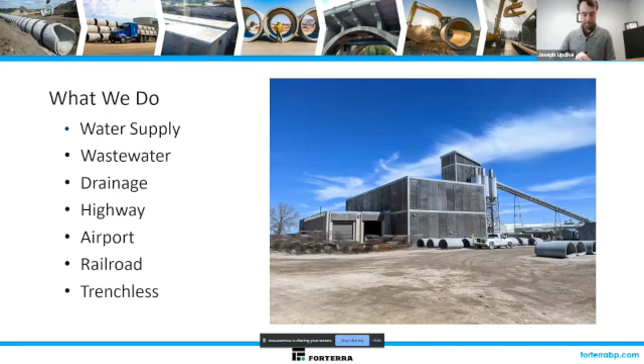So moving on, a little bit about Forterra. We are, as Cheryl mentioned, the largest precast concrete pipe and drainage manufacturer in North America. We design and provide solutions that apply to water supply, wastewater, drainage, highway, airport, railroad, and even trenchless applications as well. Some of the products that we have include pipe, box culverts, bridges, catch basins, and many other precast concrete products as well.

So what we'll be going over today is more or less we'll start with the definitions of sustainability and resilience and work off of that. We will apply those principles to see how resilience and risk relate, as well as how sustainability applies to the environmental, social, and economic aspect of our world. In other words, the triple bottom line. At the end, we will provide a summary of everything we talked about as well.

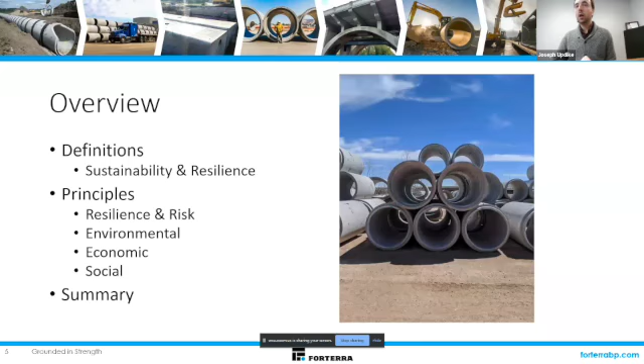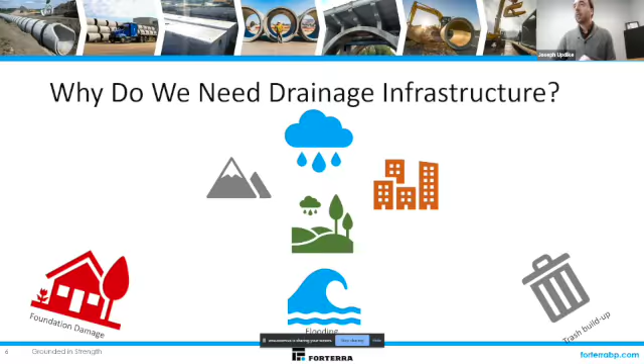But briefly, before we get to that, I want to go over some foundational principles. First off, we can ask the question of why do we need drainage infrastructure? The best answer to that is namely because it rains. It can rain on mountainous terrain and flow into the lower grounds, and this also affects our cities as well. If the rainwater that amounts over time is not taken care of, it can result in foundation damage, significant flooding, or even trash and debris buildup within our cities.

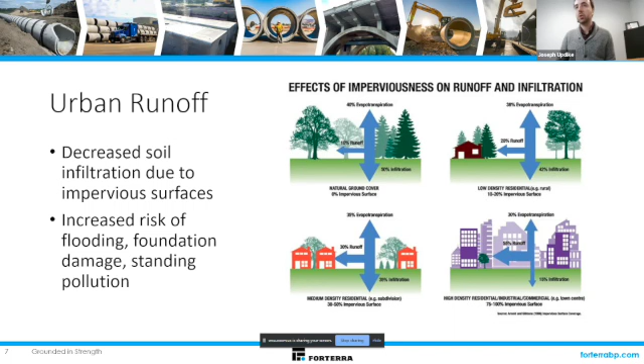When it comes to urban runoff, comparing that to rainfall that covers natural ground, you see that 10% of the water on natural ground goes to runoff, and 50% goes to infiltration. It is able to seep into the ground. When you look, on the other hand, at the high density residential, industrial, or commercial in the lower right picture, you can see that 55% of that rain goes to runoff. This is where you have the increased risk of flooding, foundation damage, or standing pollution.

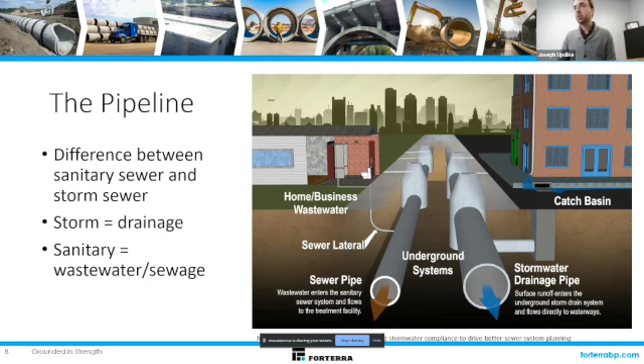Drainage infrastructure comes along to take care of that in an organized way, to protect against foundation damage, and carry the surface runoff into the underground storm drain system, and is able to carry that directly to waterways. Just a technical note as well, there's a difference between our underground systems: we have storm sewer or drainage, as we call it, and this is differentiated from sanitary or wastewater systems as well. So there are two different approaches to handling the water that needs to be taken care of to benefit society.

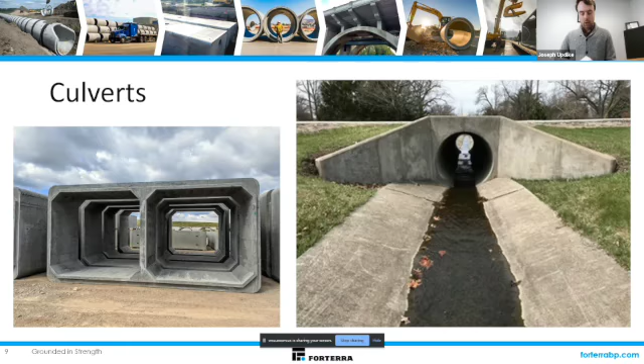For culverts as well, these end up assisting in protecting the foundation for roadways. On the left side of the screen, you can see what we call a double cell box culvert. These are for applications where you have a lot of water running underneath a roadway system. For smaller applications, you see the picture on the right, and this is an example of minor drainage that needs to prevent erosion of the highway or road foundation.

And so looking at the pipe itself, you need to see what functions that the pipe should be able to perform. First of all, it needs to be able to carry a load. The examples that we have are the earth load, the live load, which an example of that is cars running over the top of a highway. You also have construction loading, as they are compacting soil and moving heavy equipment over the installed pipeline. The pipeline needs to be able to carry those loads over the duration of its lifetime.

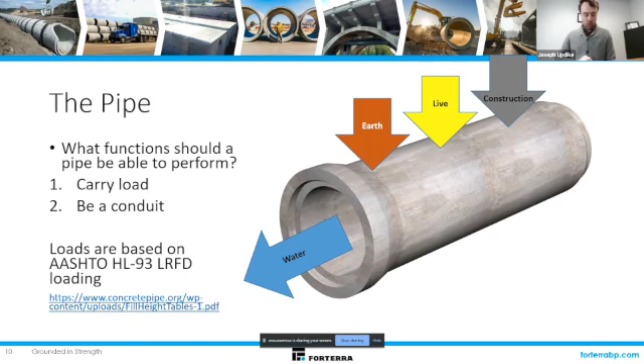The second thing that a pipe is meant to do is serve as a conduit. It needs to allow water to pass through it. These loads as well are based on AASHTO HL93 from the LRFD Bridge Design Manual as well. We have a link here to direct you to a place that provides more information on that.

Another thing I want to highlight is there are multiple kinds of pipe as well. There are rigid pipe and there are flexible pipe, which have a completely different design approach when you are analyzing the loads that they experience, as well as the way that they provide a conduit for water as well.

For rigid pipe, it does not bend. The technical definition is that it is able to deflect less than 2% without cracking. For flexible pipe, it is designed to bend. The technical definition for that is it is able to deflect more than 2% without showing signs of cracking in the pipe wall. Rigid pipe is typically very heavy, whereas flexible pipe are usually very light. The examples that we see with this are plastic and metal pipe, and rigid pipe are going to be your reinforced concrete pipe, which we're talking about today, and your vitrified clay pipe as well. So those are the two most common examples of a rigid pipe.

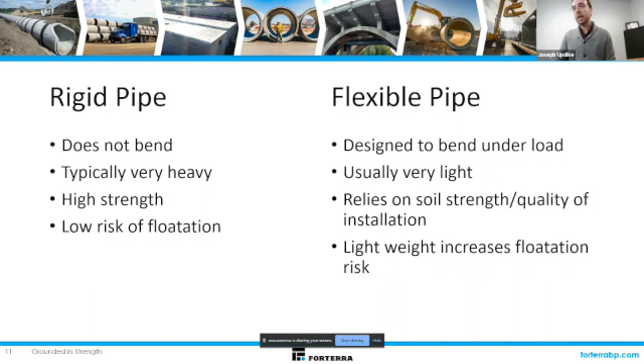Rigid pipe also provides high strength, whereas flexible pipe relies on the soil strength and the quality of installation. Rigid pipe, due to its weight, has a very low risk of flotation, which we'll talk more about in this presentation, whereas flexible pipe, because it is so lightweight, has a high risk of flotation as well.

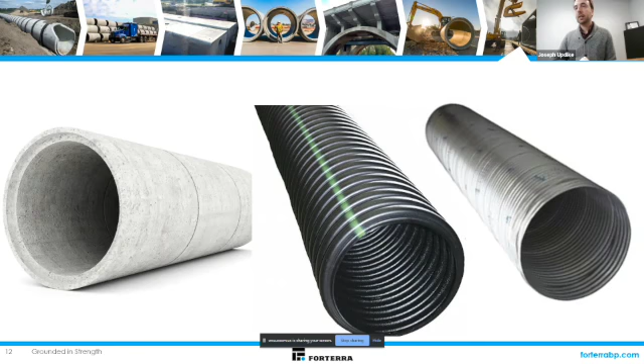And these are just some visual examples of what the rigid and flexible pipes may look like. So we'll skip questions for now and go directly into the presentation on sustainability and resilience.

So why are we here? Why are we talking about these topics? The main reason is that this is a forward-minded aspect of civil engineering. The generations of the future depend on us making responsible, resilient, and sustainable decisions today. This is ultimately part of the legacy that we leave behind us.

But the definition that I want to look at for sustainability is simply this: the ability to exist continuously, or a more common one, meeting our own needs without compromising the ability of future generations to meet the needs of their own. Many people primarily associate sustainability with environmental considerations, but the core concept of sustainability encompasses much more than that.

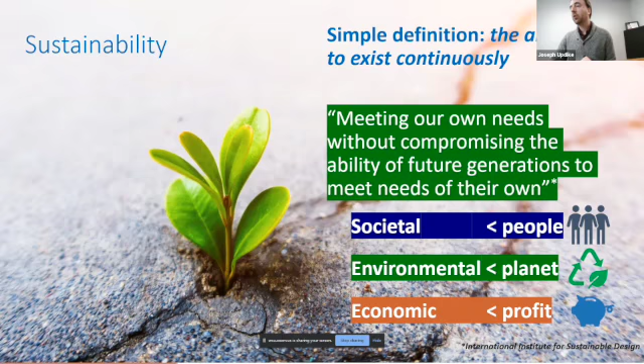Sustainability is looking at everything with a long-term lens. Traditionally, sustainability is categorized by societal, environmental, and economic sustainability. These categories encompass what is referred to as the three pillars of sustainability: the triple bottom line, or people, planet, profit.

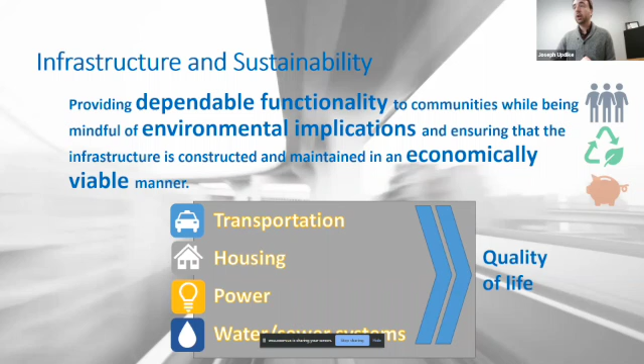It's important that every transportation, housing, power, water, waste, and drainage system be constructed with all three aspects of sustainability as a top priority. Doing so will ensure a higher quality of life for generations to come. Engineers and decision makers must not only be focused on meeting the needs of our communities today, but tomorrow as well. So from here, I will also ask, what does resilience mean for you?

Some things that may come to mind are resistance, limiting impacts, response to adversity, durability, toughness, flexibility, or robustness. The definition we're using today comes from AASHTO, the American Association of State Highway and Transportation Officials. Resilience is defined as the ability to prepare, plan for, absorb, recover from, or more successfully adapt to adverse events.

Because of the present threats that our infrastructure system faces, sustainability should always be coupled with resilience. Infrastructure that is sustainable and also not resilient will inevitably fail because it cannot adequately resist disturbances and will require frequent repairs or replacement. Resilience should thus be seen as a necessary supporting element of sustainability.

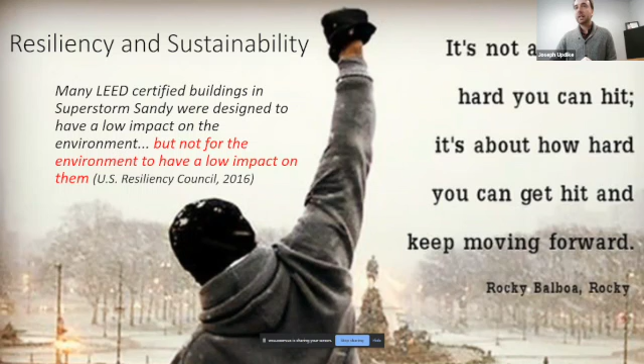In short, I like to think of resilience as a Rocky Balboa quote when he said that it's not about how hard you can hit, it's about how hard you can get hit and keep moving forward. According to the US Resiliency Council, in a 2016 study, they indicated that many LEED certified buildings in Superstorm Sandy were designed to have a low impact on the environment, but not for the environment to have a low impact on them.

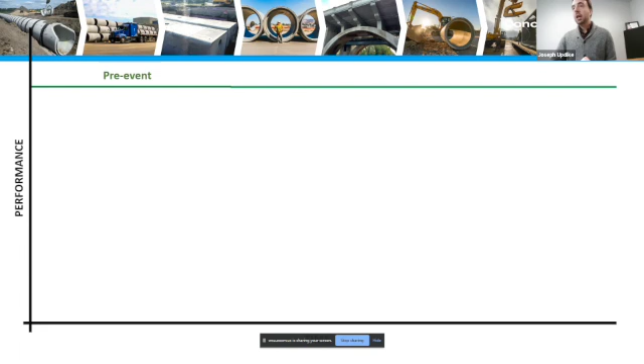Let's take a look at how a resilient system reacts to an adverse event or stress compared to a non-resilient structure. Our chart here shows the performance of the structure against the timeline across the x-axis. The green line is our pre-event performance. Culvert A, let's say, is flowing along nicely prior to any stressful event.

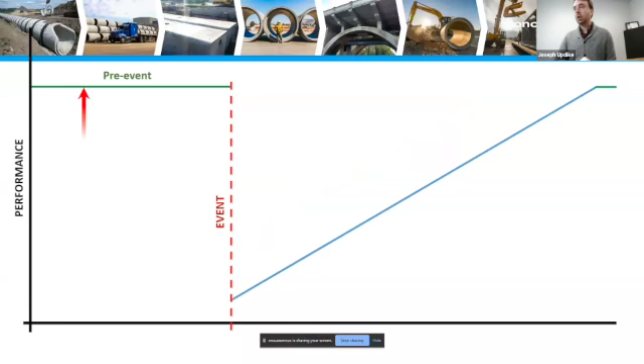Now let's introduce a stress on the system, say a major storm event. In this case, the performance of the system has dropped due to the flood. Perhaps the roadway system was damaged or the head wall experienced scour. While the performance takes a hit, this resilient system experiences only a brief recovery phase and disruption while crews work to bring it back to pre-event operational levels.

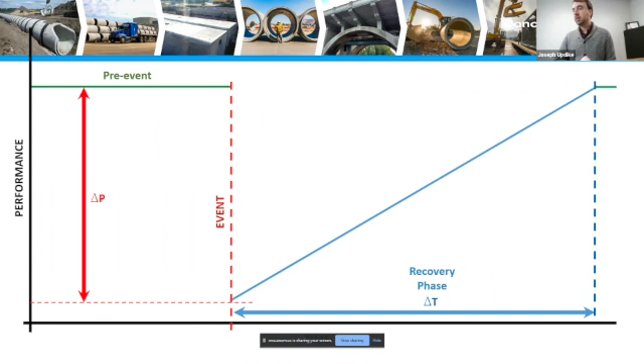But what happens if our culvert isn't resilient? We would expect the performance level to drop significantly during our hypothetical flood. Maybe the pipe backfill washes away and the culvert floats down the stream. In this case, our recovery time is much longer and the amount of energy needed to bring the system back to pre-event operation is much higher.

So how can you measure resilience? One of the keys to understanding resilience is looking at risk.

If you've ever heard of the Argonne National Laboratory, they were the first laboratory in the world to create a self-sustaining nuclear reaction in a small project known as the Manhattan Project. After World War II, this project continued and began developing energy rather than nuclear bombs.

However, they recently developed a tool for measuring resilience of particular systems by introducing a resilience measurement index. A large part of this index involves evaluating the risk of a particular system.

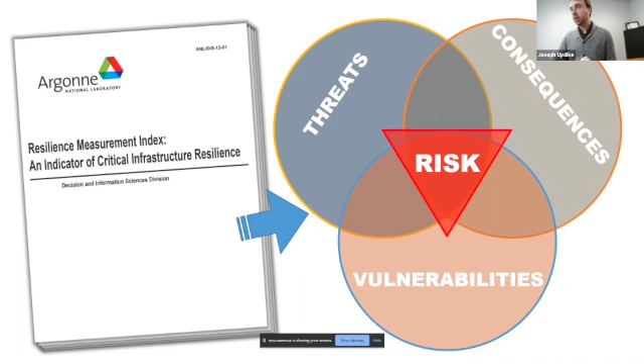In their report, they identify that risk is at the intersection of threats, vulnerabilities, and consequences, as shown in the Venn diagram. Here's another way to view that same concept. Ultimately, consequences are what you're trying to limit and avoid, but consequences are a result of threats matched against a system's vulnerabilities. Let's take a closer look at the risks involved with drainage infrastructure.

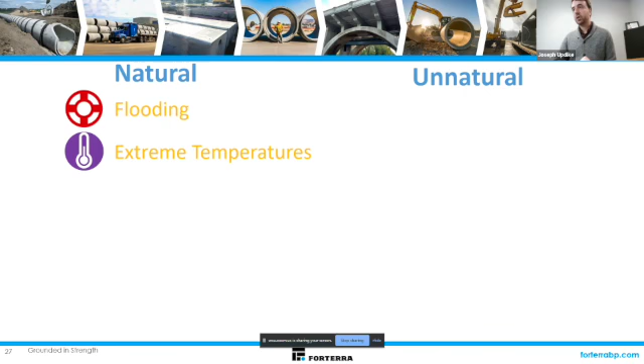We'll begin by dividing these threats into natural and unnatural threats. Flooding is an obvious issue in many places. Extreme temperatures can cause expansion and contraction of various pipe materials. Severe rain can lead to flash flooding. A tropical cyclone, which is a growing concern in many coastal regions, and wildfires as well.

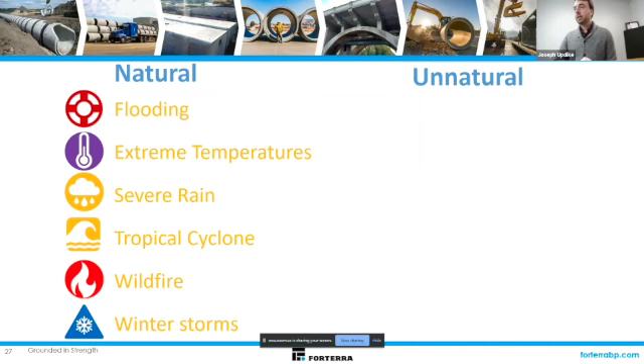While California gets the bulk of the attention, Montana had the largest acreage burned out of any state that experienced severe wildfires in 2021. Winter storms as well, which is what we're experiencing right now in South Dakota, can bring ice and freezing temperatures that cause additional concerns.

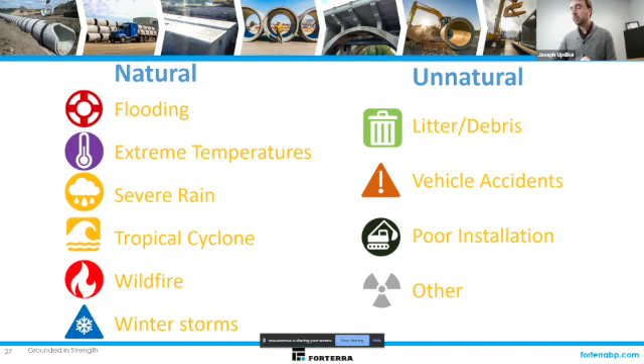Now let's look at unnatural threats. Litter and debris can cause culvert clogging and other damages. Vehicle accidents, you can think of highway fuel spills and where those liquids end up going. Poor installation - this is one of the biggest issues facing flexible pipe installations. And other issues may include vandalism, excessive loading, etc.

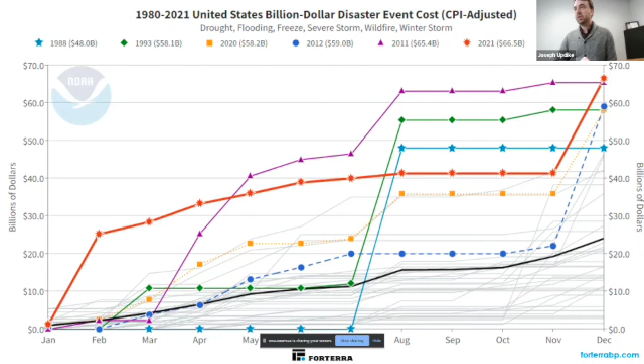The National Centers for Environmental Information tracks billion-dollar weather disasters. This data traces back to the 1980s. The total cost of these natural events has been increasing over the past few years. Resilience seeks to arm our infrastructure to minimize the impact of these natural disasters.

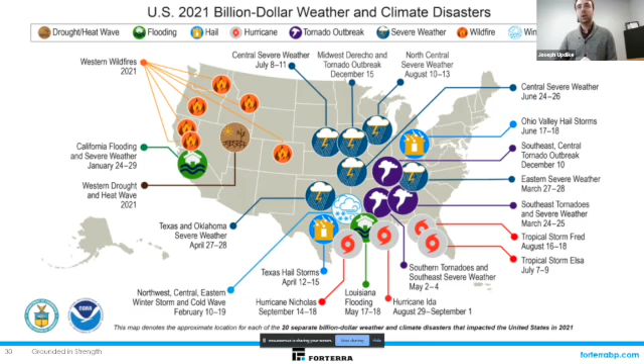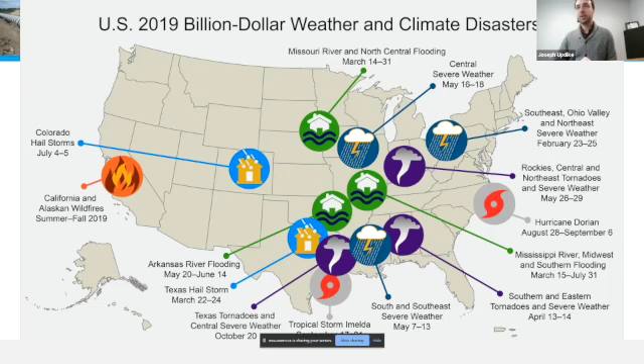Here you can see the billion-dollar disasters that took place in 2021. The Western wildfires that I mentioned certainly made a huge impact to the area where I'm from. This is also compared to the billion-dollar disasters in 2019 as well.

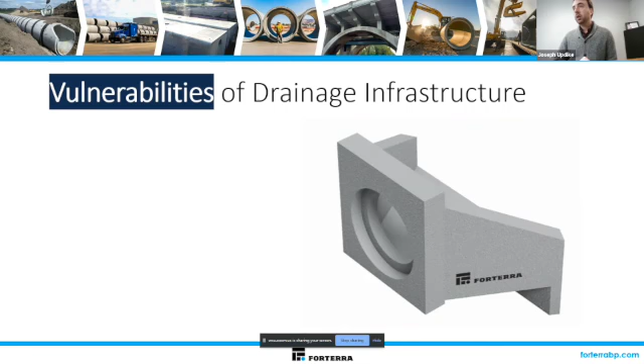What kind of vulnerabilities may there be towards drainage infrastructure? You can have culverts without a head wall, or if the head wall is missing proper reinforcement, they then become susceptible to washout and piping.

Flotation may be a vulnerability as a combination of pipe weight and cover over the top of the pipe. Certain pipe materials and coatings may be prone to catching fire. Deficient joints may lead to excessive infiltration and void formation beneath the surface.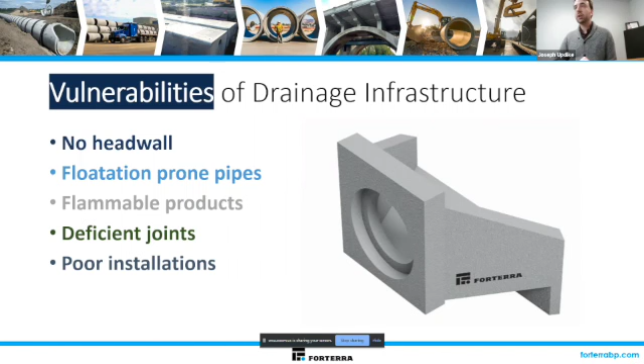Poor installations are certainly another concern. Issues in this area can be avoided with proper inspection before and after installation.

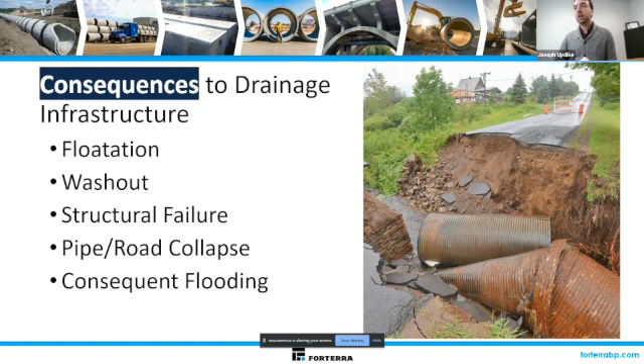Consequences are then our potential negative outcomes. And so from here, we'll talk about some specific cases of where we see the consequences play out.

I don't know if you're able to hear the video on this, but here we see a number of examples of storms as well. These may include 100-year, 500-year, and 1,000-year storms.

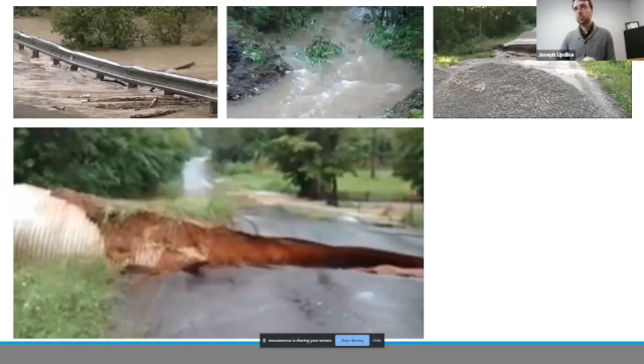Another example comes from a colleague of mine in Georgia, where the road had washed out over a creek during a storm. 2 of the 5 pipes that are shown here washed out along this roadway.

This was a cul-de-sac leading to over 10 homes. During the duration of the storm, this entire subdevelopment was left without access to an escape route or food, and the ability to move in and out of their homes.

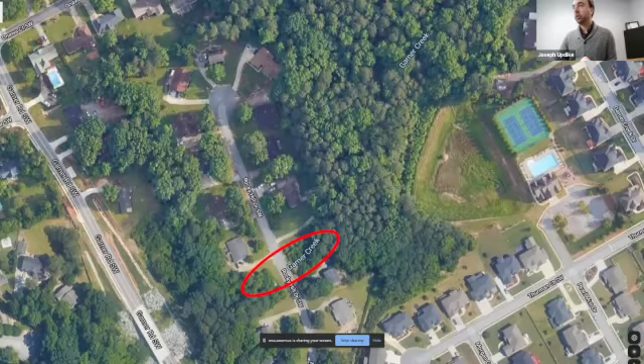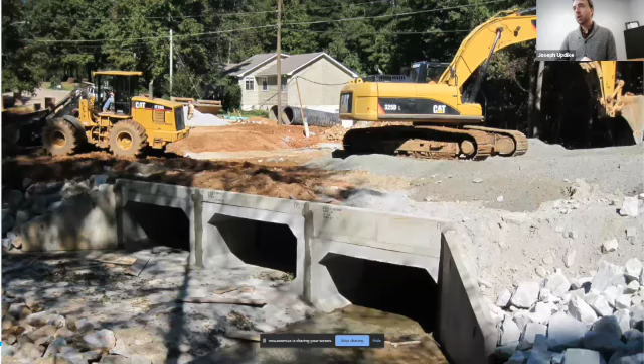This area that washed out was called Garner Creek - these people were left stranded until the proper repairs could be made. Downstream from the washout, my colleague was able to find fragments of this corrugated metal pipe. As you can see from the corrosion, this pipe had failed long before the flood ever happened.

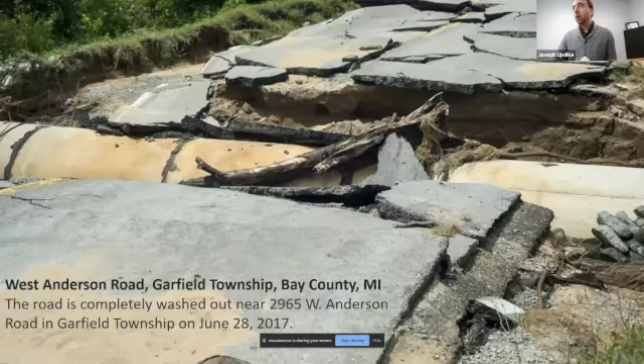This is an example of the latter. It took a long time for these boxes to be put in and for the people in the subdevelopment to have access to leaving the area of their homes.

The primary hope in managing resilience is that something like this never happens. However, because reinforced concrete pipe is naturally resistant to flotation because of its weight, it allowed for significantly lower repair times than what happened in the previous example.

Instead of entirely replacing the pipeline, the road over the pipe was able to have additional backfill placed over it, and the base course laid and pavement re-put.

The Santa Rosa fires in California in 2017 ended up burning more than 5,000 homes and killing 23 people. City codes required the last 20 feet to be constructed of a corrugated metal material in order to avoid fire risk.

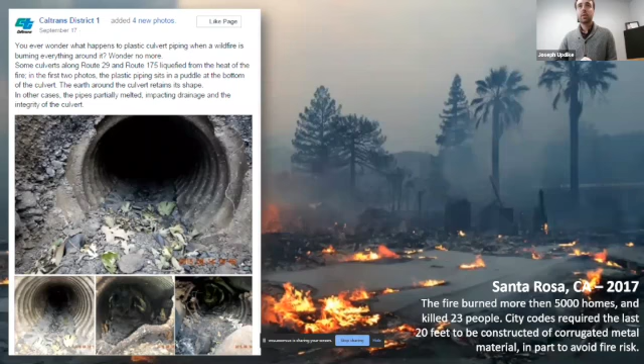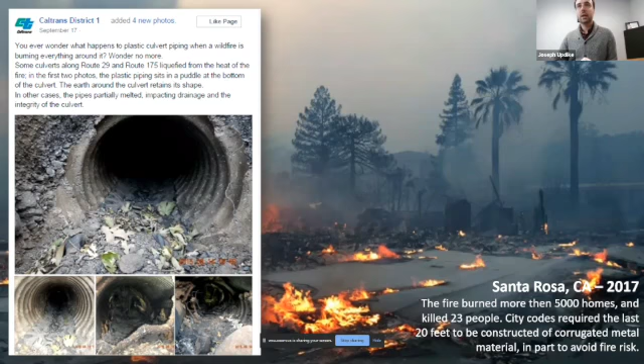This is a post on social media from the Department of Transportation in California, where they asked what happens to plastic culvert piping when a wildfire is burning everything around it. Some culverts along various routes liquefied from the heat of the fire. In the first two photos, the plastic piping sits in a puddle at the bottom of the culvert. The earth around the culvert retains its shape.

In other cases, the pipes partially melted, impacting drainage and the integrity of the culvert. Another example comes from Santa Rosa, California. Wildfires can significantly endanger a piping system, and because they are so critical to the support of the road and various escape or evacuation routes, it's critical to have a pipe that is resistant to emergency disasters.

Another thing about plastic piping is it releases volatile chemicals such as benzene when burned. Benzene is a carcinogenic hydrocarbon associated with crude oil that's strictly regulated by the EPA. Even if a building survives a wildfire, breaches in the system miles away can still contaminate its water.

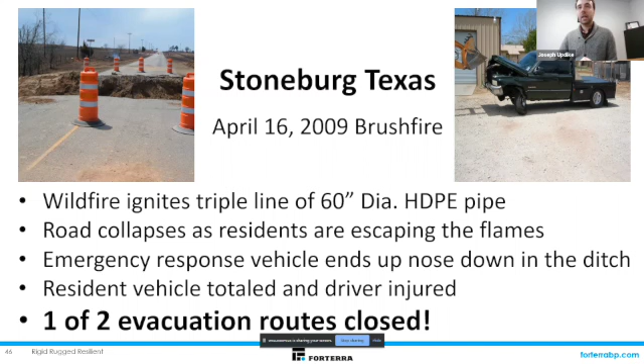Another example comes from Stoneburg, Texas, where a wildfire ignited a triple line of 60-inch diameter high-density polyethylene pipes. The road collapsed as residents were attempting to escape the flames. Emergency vehicles ended up nose down in the ditch as well. And this resident, with his pickup shown there, ended up totaling his vehicle, and the driver ended up being injured. One of the two evacuation routes in Stoneburg during this fire was closed as a result.

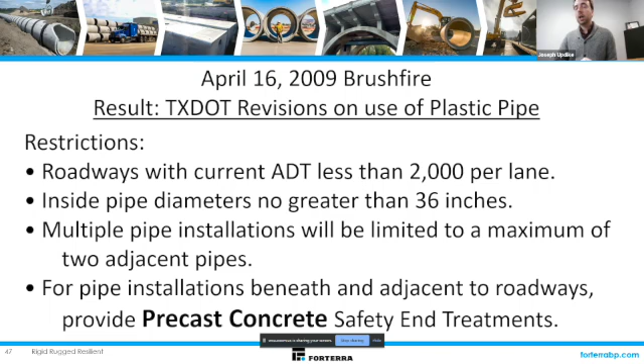Given the disastrous effects of the fire, the Texas DOT implemented a number of restrictions. Plastic pipe was not able to be used under roadways with a current average daily traffic less than 2,000 per lane. The inside pipe diameters could be no greater than 36 inches. Multiple pipe installations were limited to a maximum of 2 adjacent pipes. And for pipe installations beneath and adjacent to roadways, they were required to provide precast concrete safety end treatments as well.

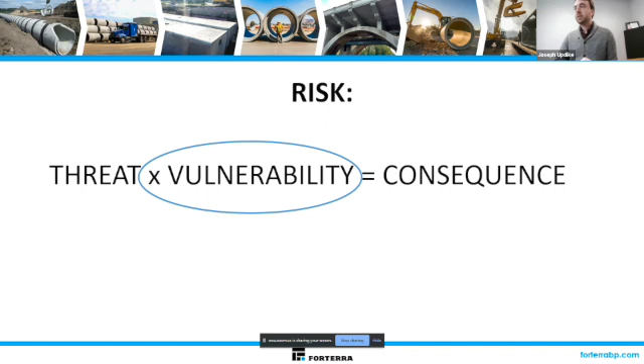This ultimately goes back to show that consequences are a result of vulnerabilities matched against their threats. Threats are ultimately inevitable, although some aspects of environmental sustainability seek to reverse the trend of those threats for the foreseeable future. We will be forced to deal with these threats one way or another. Consequences can also be limited by planning and reactive measures, but reducing vulnerabilities is perhaps the most effective way to limit or remove consequences from threats.

Resilience is ultimately about mitigating risk. When it comes to drainage systems, designing resilience will limit system vulnerabilities and in turn reduce or eliminate potential consequences.

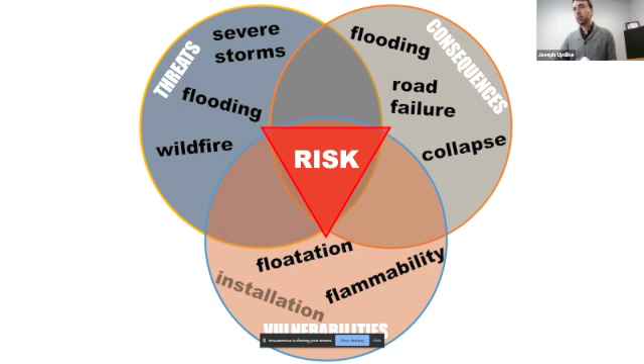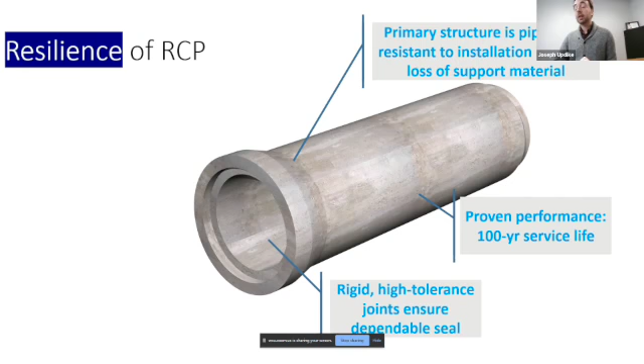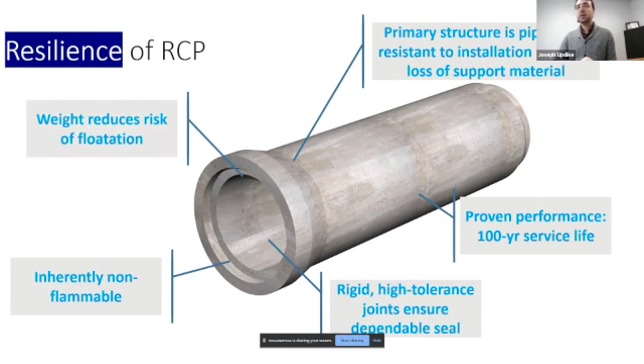Concrete pipe provides inherent resilience that is unmatched by any other pipe material. Reinforced concrete pipe provides the primary structure, and is resistant to installation issues or loss of support material. Concrete pipe is the only pipe material that has a proven performance of 100 or more years for its service life. Concrete pipe is rigid, and that provides for high tolerance joints that ensure a dependable seal. Reinforced concrete pipe is also inherently non-flammable, and its high weight reduces the risk of flotation.

More decisions are being made today on the basis of environmental sustainability than ever before. Environmental sustainability includes a whole gamut of categories, such as air and water quality, waste, pollution, and fresh water use, but most people probably think of climate change first. This is primarily measured by looking at greenhouse gas emissions.

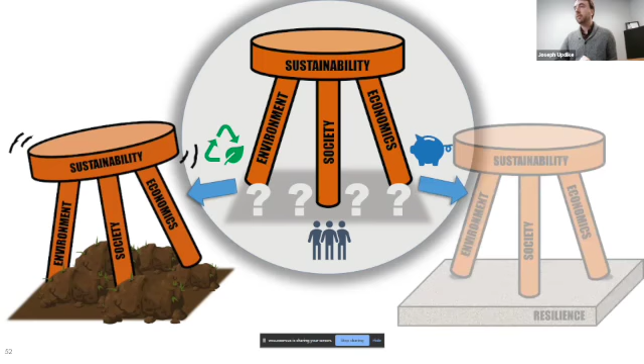Each of the pillars of sustainability provides a unique facet to our quality of life. But as we move into this section, let's keep in mind that the foundation of this sustainability is resilience. As with any structure, if it isn't built on a solid foundation, it doesn't matter how strong your pillars are.

If you've ever heard that if concrete was a country, it would be third in the world in terms of emissions. However, concrete itself has actually relatively low emissions. The reason we hear the total emissions are so high is that there are 10 billion tons of concrete used every single year, which is more than 5 times as much as any other product material. Concrete is also the most used material in the world next to water.

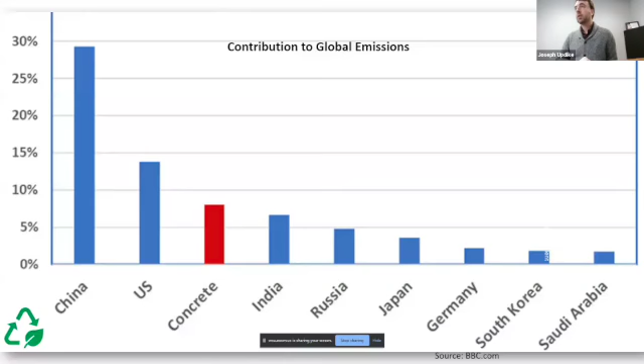However, we can still do what we can to limit emissions. But remember that concrete is a gigantic part of our infrastructure. If we want to look at the sustainability of a particular material, we need to compare it to what an alternative product would look like.

Here it is immediately evident that concrete pipe has the lowest emissions factor on a per weight basis than any other pipe product. Compared to HDPE pipe, reinforced concrete pipe emits less than one-tenth of the equivalent CO2 per unit weight.

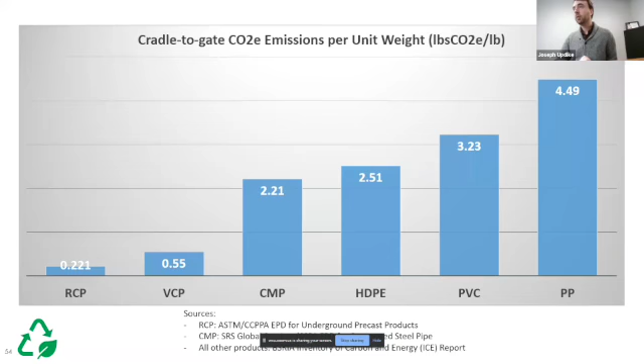75% of concrete's makeup are raw natural resources, such as rock, sand, and water. So it makes sense that it has the lowest emissions of almost any material.

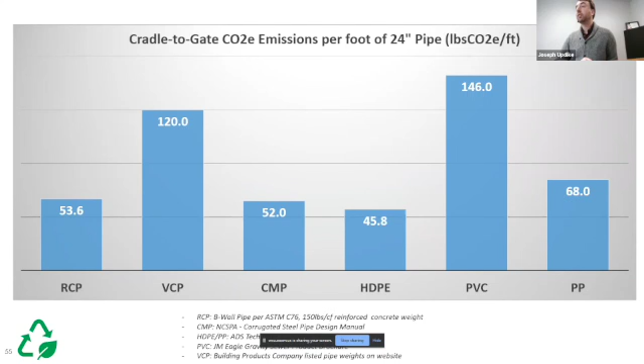However, if we factor in the pipe weights for a given size, the per foot emissions for RCP are still less or comparable to some of the other common drainage products. To be fair, the higher weight of reinforced concrete pipe is providing resilience and structural performance that simply cannot be matched with other products.

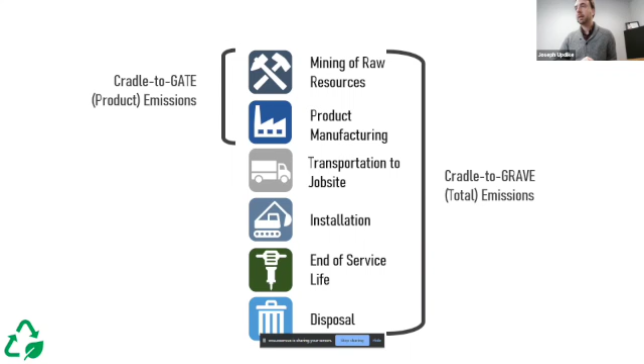Many studies only evaluate the cradle to gate emissions, meaning they only include up to the point where the product is ready to be shipped out of the factory where it was produced. This is really only a fraction of the whole picture. A comprehensive look at total emissions related to drainage pipes shows concrete pipe as the most sustainable material choice.

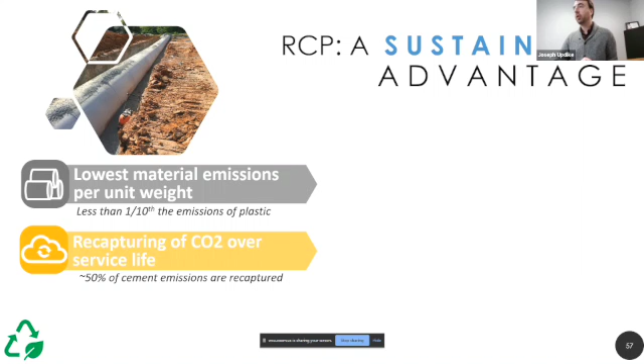Reinforced concrete pipe has the lowest material emissions, which we just looked at. Reinforced concrete pipe also recaptures carbon dioxide over its lifetime. It's well documented that roughly 50% of cement emissions are recaptured over a 100-year span of concrete. For RCP, that reduces net emissions by 25%.

For transport distance, the American Concrete Pipe Association has over 200 plants in the US. Plastic pipe, depending on the material type, has less than 50. Plus, they typically provide through distributors. Direct shipments mean less miles on the road and less emissions.

Imported fill emissions, volumes based on AASHTO trench details. The structural backfill must not only be mined and shipped in, but excavated backfill may need to be shipped out as well.

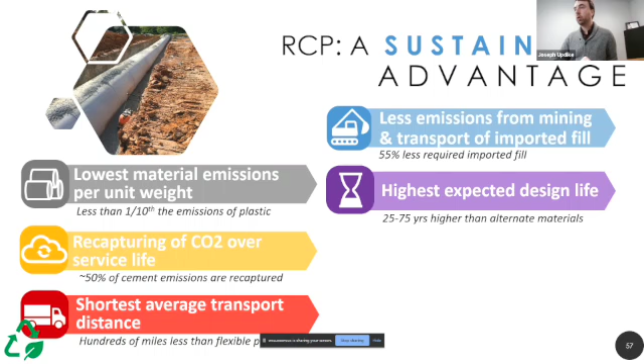For the service life, many sources have documented reinforced concrete pipe with a 100-year service life. Corrugated metal pipe is lucky to get 50 years. The jury is still out on plastic pipe, but sources such as the Army Corps of Engineers are hesitant to give it anything above 50.

For reuse, reinforced concrete pipe sections can either be reused or broken down and recycled as crushed aggregate at the end of their service life. Many coastal regions as well use it for reef restoration projects.

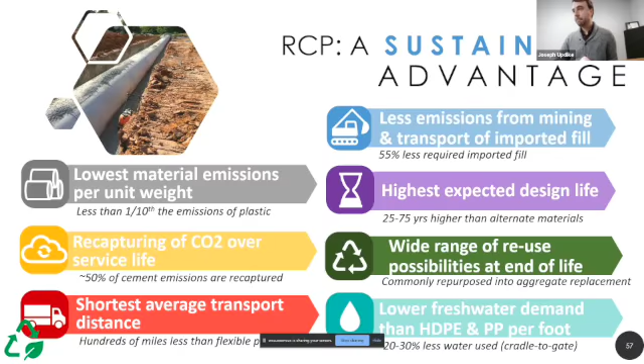For freshwater demand, according to Plastics Europe, they released a report that described an environmental product declaration for reinforced concrete pipe, noting that it had significantly lower water demand than plastic pipes.

Now we'll move on to economic sustainability. To account for environmental sustainability, we need to take into account not only emissions to the point where the product is ready to be shipped out of the factory where it was produced. The overall life of the product must be evaluated.

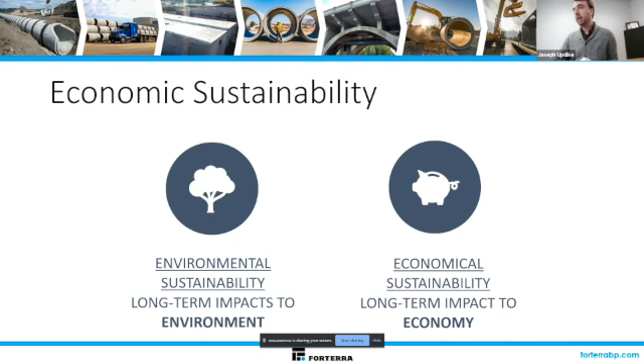The factors affecting the economic sustainability are also based on a complete life cycle. Short-term costs may look appealing to entities who are looking to make their budget each year. That can cause a burden on future generations from maintenance and/or replacement costs.

Let's compare this to purchasing a new vehicle. Purchasing a new vehicle that has the lowest upfront cost may seem like a wise decision based on your budget at the time of your purchase. The upfront cost of a car is not the only cost when we talk about the total cost of ownership. Going with the cheapest sticker price car may mean more expenses in areas like insurance, maintenance cycles, unforeseen mechanical issues, or even just the life expectancy of the car.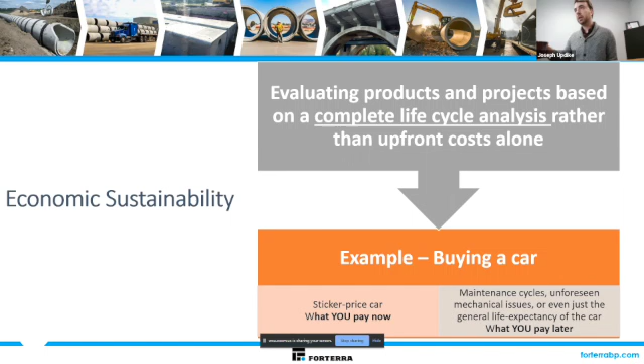Spending extra dollars on a more durable, proven vehicle will often offset the additional costs and provide the lowest cost of ownership in the long run.

Now we can apply the principle of economic sustainability to infrastructure. A desirable, economically sustainable infrastructure means that as a community grows, the economic resources necessary to build new systems and maintain or replace existing systems will be retained at a manageable rate.

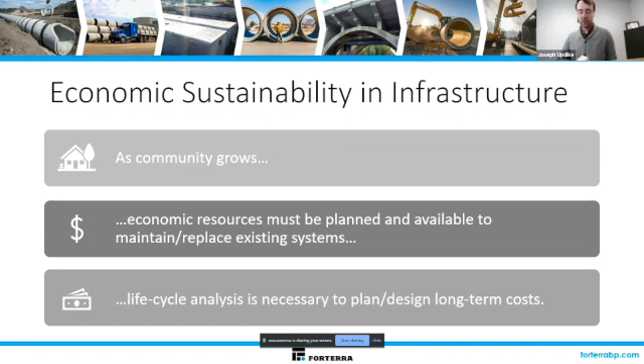For this to be achieved, designers and decision makers must take life cycle costs into account. The life cycle cost analysis is an analysis methodology that enables decision makers to better understand the economic impacts of infrastructure over its service life.

According to a study by ASCE and the ENO Center for Transportation, only 59% of governmental agencies across the US employ some type of life cycle cost analysis. Typically, when they do, they are related to pavement materials and go no further. Moving towards economic sustainability means applying this methodology to more things.

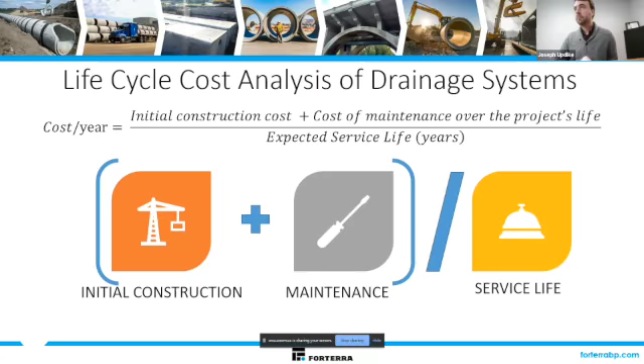Now we can break down each of the categories within this equation. We'll take a closer look at the initial construction, the maintenance, as well as the service life.

Beginning with initial construction, the initial cost is made up of pipe material cost, the cradle to gate cost. This is most often used as the basis of cost, but there are more factors that need to be added when calculating initial cost.

Installation materials and methods cost. Installation is directly linked to the structural behavior of the pipe. And then last but not least, the cost of inspection.

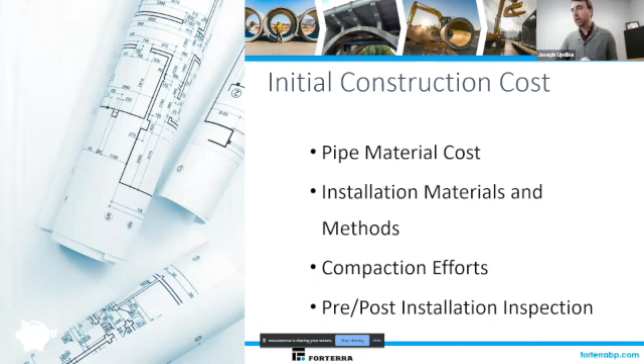Different pipe materials will have different requirements for post-installation. Without proper construction inspection, an improperly installed storm sewer or culvert will likely require more maintenance than it would had it been properly installed. Some examples include proper joint connections, proper bedding preparation, and the compaction of haunch and backfill materials of the pipe.

Typical maintenance items include cleaning or jetting of the line from debris, fixing or repairing sealing individual joints, or addressing deterioration in a pipeline, or the lining of the pipe when deterioration cannot be fixed.

When calculating maintenance costs, local trends should be considered, since each local market and agency has its own unique characteristics. Routine inspections can catch small issues before they become big issues.

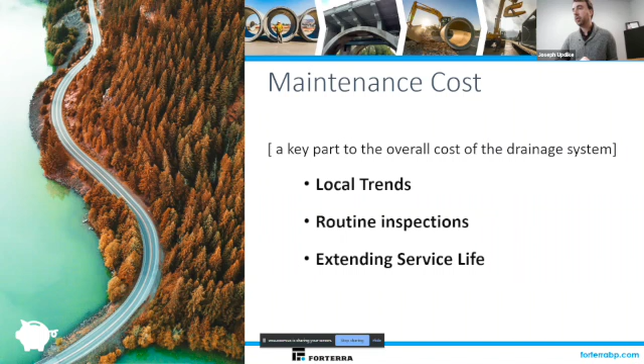Many bridge and culvert failures have been avoided because people flagged the issue before something catastrophic happened. Routine inspection also allows entities to track culvert condition over time to estimate a rate of deterioration to help with planning. Some pipeline rehabilitation projects, while pricey, may effectively extend the service life of the pipe beyond the original service life estimate.

One of the things to look at when it comes to service life is the actual service life of the product versus the promoted service life of the product. Manufacturer claims, including those of reinforced concrete pipe manufacturers, should be checked against third-party sources when calculating service life.

The National Cooperative Highway Research Program, as well as the Army Corps of Engineers, published a table of expected culvert life expectancies for different materials for most conditions. You also have local experience and conditions.

Agencies can use their own local data to calculate an actual proven service life of a pipe instead of using a theoretically provided value. One great example is a report put together by the City of Olympia in Washington, where they looked at their own data to determine life expectancy of culverts and to determine true costs of each material's life. You also have pipeline construction inspection.

A properly inspected culvert will likely last much longer than one that is not. Issues or shortcuts in the construction of the pipeline may not surface until long after the contractor is gone.

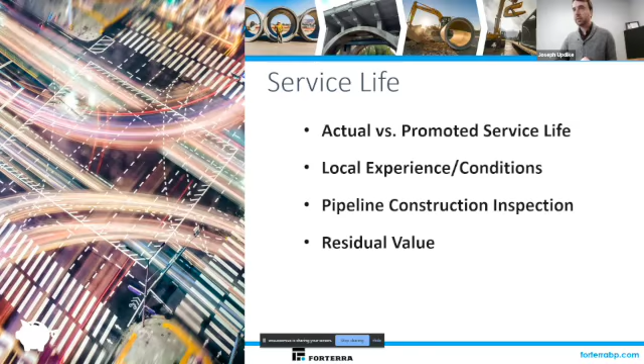Flexible pipe standards focus on the terminal value of a pipe, given that flexible products are hard to remove without damaging or deforming the pipe, making it harder to reuse. Rigid pipes, on the other hand, focus on the residual value in terms of reuse, since their structural performance allows, in many cases, for the pipe to be removed without damage and then reused on another project.

So in summary, reinforced concrete pipe has an incredibly high initial value. When concrete pipe is purchased, the contractor is getting a structure delivered to the site.

Because the majority of the structure lies within the pipe itself, concrete pipe has the lowest installation costs associated with proper placement of structural backfill around the pipe. Not only is the structural backfill only required up to the spring line of the pipe, but the smooth exterior of a concrete pipe means you don't need to worry about the extra work needed for working backfill into and around corrugated exteriors.

Concrete pipe also doesn't require mandrel or laser profiling to be completed as verification of the soil structure. Concrete pipe has the highest proven design life in the industry, and we are confidently proud of that.

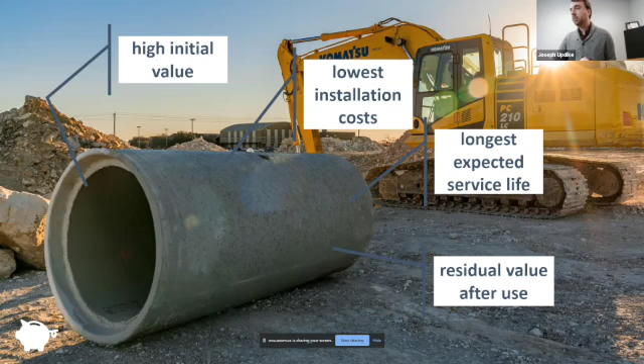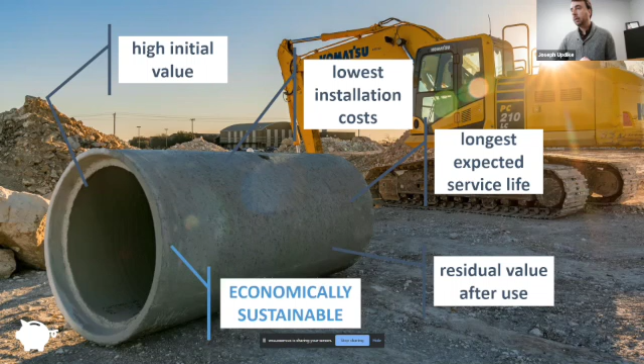Concrete pipe is durable enough that in many cases, at the end of life for one project, it may still be acceptable to remove and reuse the pipe on another project. This residual value is an important economic consideration. All of these things make concrete pipe a true economically sustainable product.

From here, we'll move on to societal sustainability.

The performance of our infrastructure is critical to the function of our communities. The American Society of Civil Engineers surveys the condition and functionality of infrastructure systems of different states and the country as a whole. One of their latest ratings, given in 2017, gave the United States a D+ grade overall, with a score of D for roads, D+ for wastewater, and a C+ for bridges.

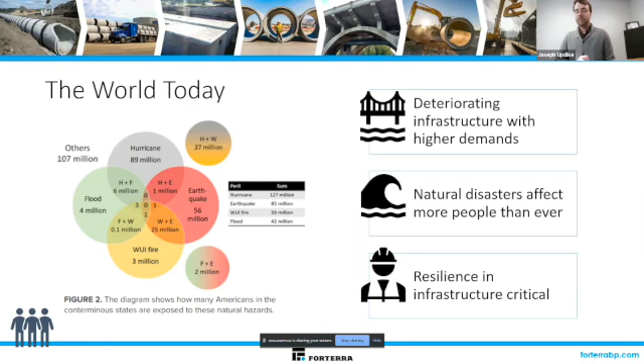According to the National Centers for Environmental Information, the United States was impacted by 22 separate billion-dollar disasters in 2020. Out of those, 12 were water or fire related. These disasters are only made worse if they cause underground infrastructure to fail.

Consequently, when it comes to the drainage industry, members of society are called on to rely on infrastructure that they will rarely have to see, think about, or take notice of. At least, not until a failure occurs that significantly impacts the way of life, health, safety, or well-being of those we serve as engineers. More than ever, we need to be designing infrastructure with this thought in mind so that we may ensure the communities we serve also face natural disasters in the most resilient way possible.

As I mentioned before, our industry creates a product that the public rarely notices. Usually, if they do, it means something is wrong. Drivers rely on roads every day to get them to where they need to go. For the infrastructure that helps support these roads, it should also be our goal to keep the driver's peace of mind intact when choosing the right pipe.

At the end of the day, it is this aspect of trust that allows our society to be sustainable. Without it, it can result in significant detriment. But with it comes an established long-term benefit to our communities as we press forward together toward a sustainable and resilient future. However, this isn't just the responsibility of the engineer.

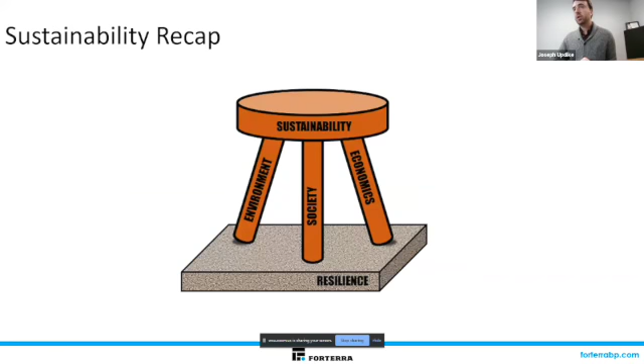When we don't design for sustainable infrastructure, it means we are only solving permanent problems with a temporary fix. To combat this, all functions of society ought to be well educated in terms of how infrastructure affects the health and sustainability of the communities we live in. To accomplish this end, we as the designers and operators must know the impact that inadequate infrastructure can have on society, as well as how resilient infrastructure provides the solution to not only the ethical responsibilities, but also as a means of improving the livelihood and well-being of the communities we serve.

So as a recap, remember the why of sustainability. Sustainability is the key to building a brighter future for our families and our communities. What we do today affects tomorrow. In terms of environmental sustainability, this means being conscious of our world and the environment we live in.

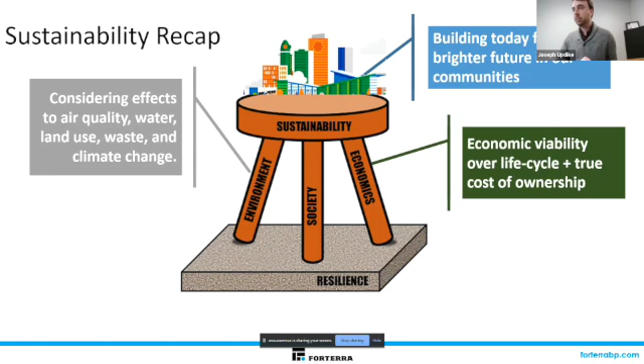How does our infrastructure impact air quality, availability of clean water, land use, waste, and long-term climate change? For economic sustainability, it means looking beyond this year's budget and evaluating true cost of ownership. For societal sustainability, it means limiting delays and improving social convenience while keeping user safety a top priority. Lastly, an integral part of sustainability is ensuring that our infrastructure is resilient enough to resist and defend our communities from present and future threats.

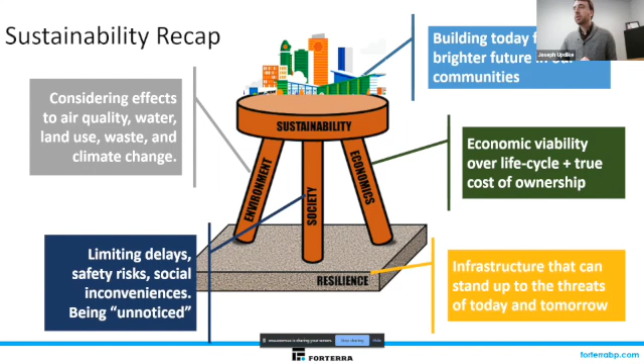Let's invest in a more robust infrastructure today so that we can save resources and headache in the future for ourselves and others. Sustainability and resilience need to be an integral part of how our infrastructure is built. Reinforced concrete pipe boasts some of the most sustainable and resilient features of any pipe product. When considering full life cycle impacts, reinforced concrete pipe is the most sustainable product and is also inherently resistant to flooding, fires, and other threats to drainage infrastructure. This helps to improve user safety, convenience, and overall quality of life. Concrete pipe has been and continues to be a key tool towards building sustainable and resilient communities.